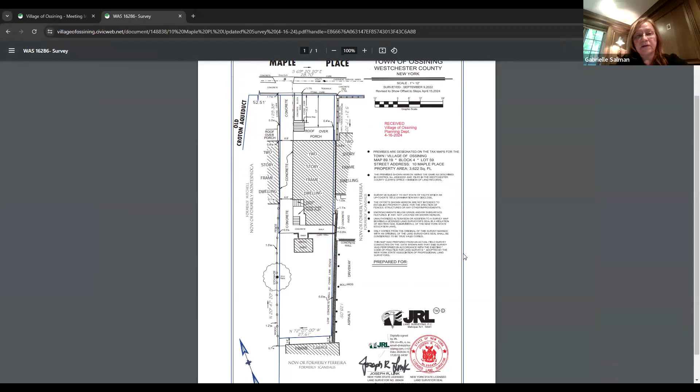And all those items are in non-conforming condition with respect to the zone. We are required to have 30 feet in the front yard, and we have 14 and a half. I'm sorry, we have 15 and a half, and need a variance of 14.5. And with respect to the side yards, we have one yard only 0.2, therefore we require a variance of 7.8. And we have combined yards of required 20, and we have only 7, so we need a variance of 13.

Now, these are existing conditions going back to, I guess, 1825. These are not self-created. This is a legal two-family with a legal basement, which we are going to be renovating as well. And we would like to get these variances in order for us to continue with the project.

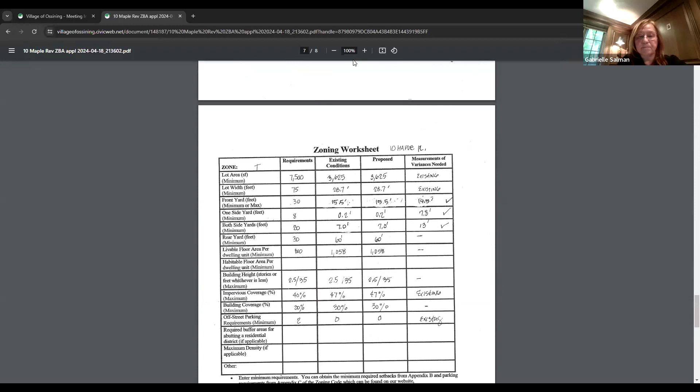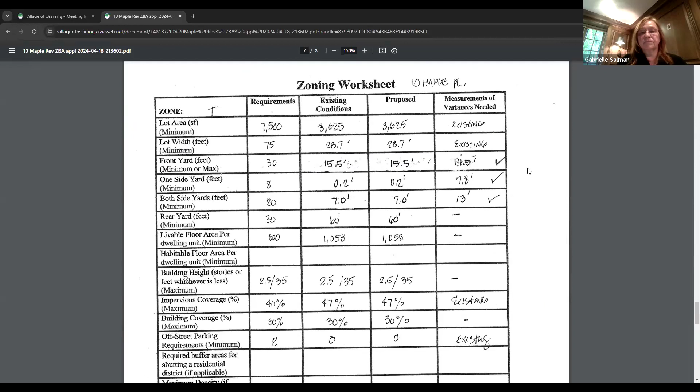Are there any questions from the board? You're Mr. Chen, correct? Yes. Okay, thank you. No question from the board?

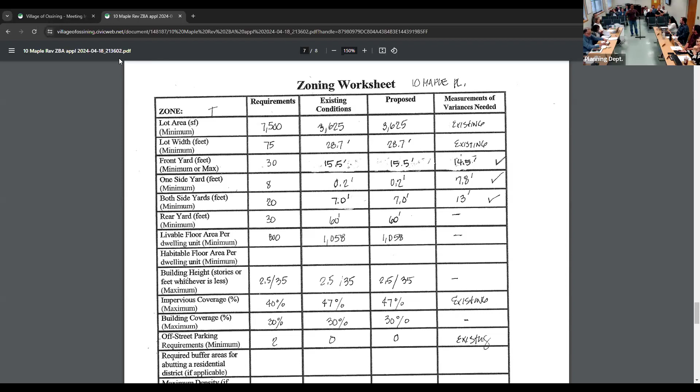But the main thing, like the architect says, is it's a two-family, and I know we have little kids too, and I don't want any accidents. Even myself during the winter, the steps are really old and slippery. I would like to change them to the new products out there now, like AZEK, to make it look nice the way everybody's doing these days, because most of it is painted and the paint is peeling off, and I think there's some lead too, since it's pretty old.

That's why it's one of the main reasons we've been trying to get the project going, and we've been in the process. So I understand you have a porch there that's being replaced, correct? Yeah, there's a porch already existing, we're just replacing it, updating, basically repairing it, because one side is kind of tilted a little bit, and we're gonna fix it. The roof, the shingles, everything needs to be fixed.

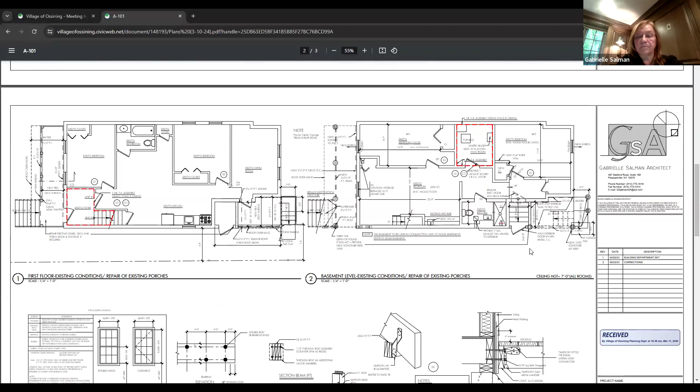This one seemed to me like one of the easy ones we've had in the past, where for safety reasons or deterioration reasons, they're replacing. Sometimes there's a small change, like doing brick instead of stone, but if the zoning board application is correct, it's keeping the exact same footprint.

Right, but then my question was, if they're not taking down the whole porch and only removing a section, do we need to be here? Did they need to be here? Normally that's not how... but that's why it was presented as a replacement. So do they need to correct the paperwork?

I think we had this conversation, and the discussion was that what was submitted was a replacement. The plans were for replacement, but the architect continues to say repair. But that's not what the thing is proposed as. So can we consider and vote on tonight what's there? And if it's not needed, then no harm, no foul? That's how I would recommend proceeding. Just proceed on the application as presented, that makes sense.

So may I have a motion to open the public hearing on this application? So moved, Kyle. Second, Brian. Is there anyone in the audience to speak on it? Is there anyone on Zoom to speak on it?

May I entertain a motion to close the public hearing? So moved. Second. It was moved and seconded. The public hearing is closed.

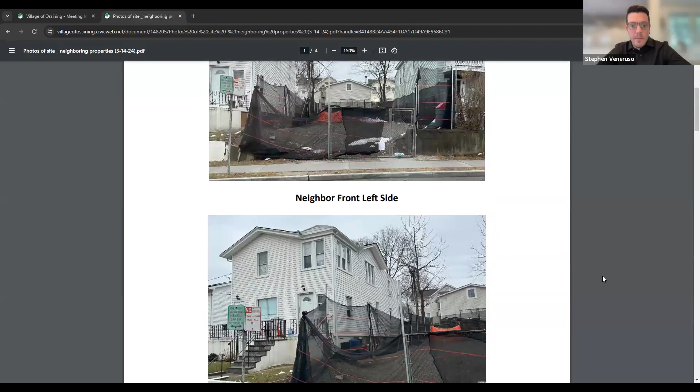The proposed project before this board consists of construction of a two-family structure with a garage for 2 vehicles on the lower level, as well as a front driveway. The building, as some on the board may know, has been vacant for a number of years.

My client purchased the property approximately 5 years ago, and my understanding is it's been vacant prior to his ownership about 15 years. So he's trying to revitalize this parcel, bring it back to life with a brand new construction of a two-family home. The proposal calls for the ground level,

the structure to be a concrete masonry structure containing a two-car garage, a common area, a powder room, and a mechanical room. Now, the two upper floors proposed using a wood frame construction system, each floor containing a kitchen, living, dining area, as well as a balcony, a laundry room, one full bathroom, and 3 bedrooms.

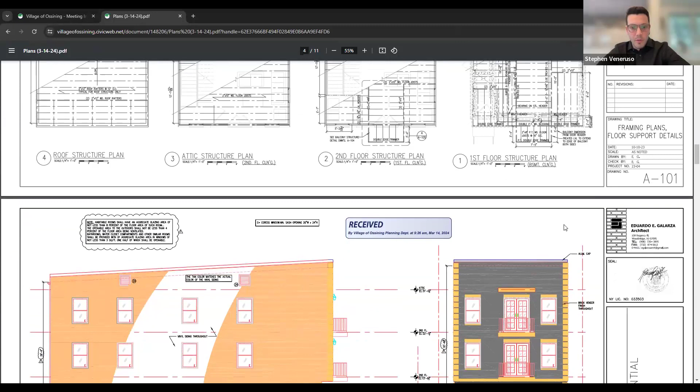In accordance with the building application review dated February 2nd, the proposed project before you seeks several area variances. These area variances are for the front yard, the side yard, both side yards, rear yard, max coverage area, max impervious surface, and max number of stories/height. Additionally, the project calls for a parking variance for the number of off-street spaces provided.

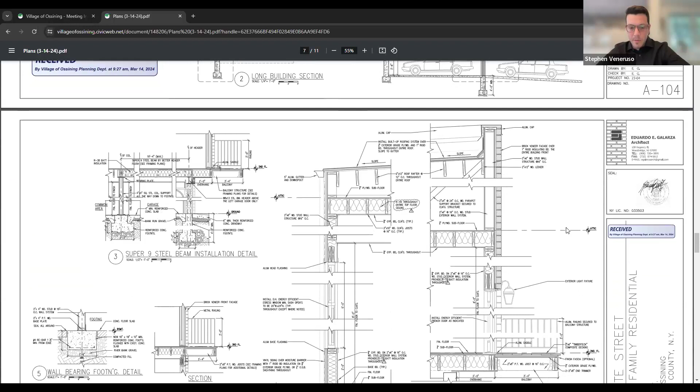Before I jump into, I want to make a couple points regarding the 5 points of law. Proper notice was sent out on this application. We have not received any negative feedback from the community.

In fact, my client did call me today. Somebody had called him, a neighbor for the parcel. I don't know whether or not they're in attendance tonight, but basically advocating for the property, stating that it has been vacant for so long, and they were excited to see this parcel come back to life.

If I could quickly go through the 5 points of law, and then I would open it up to any questions that the board may have of either myself or Mr. Galarza. One, whether the requested variance would create an undesirable change on the neighborhood.

I would argue that this would not create an undesirable change on the neighborhood, and to the contrary, I think we would submit that it would raise the overall aesthetic of not only the property but the street and the surrounding area, given the long vacant history of this parcel, as well as the fact that it's surrounded by similar two-family structures. I would argue that it would blend seamlessly into the neighborhood.

Number 2, whether the benefits sought by the applicant cannot be achieved by some other method more feasible to the applicant. The benefits sought here, we would submit that it cannot be achieved in a more feasible method. When developing the project, the applicant did look at alternate proposals as well as different ways to lay the property out and the home out. But ultimately, the seeking of variances, which we are looking for from the board, were a necessity to make the parcel work, the structure work, as well as making it economically feasible for my client.

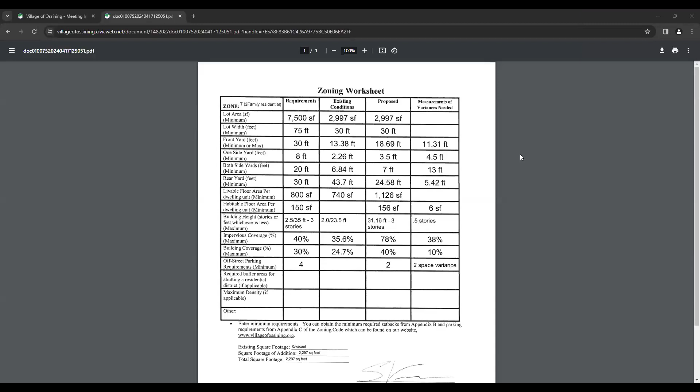Before we vote, let me correct a couple of things. The property has not been vacant for 20 years. The current owner, when he purchased it, there was a house on there. He took a demolition permit to take it down because it was in dilapidated condition. The reason I'm bringing that up is because if we were developing a vacant lot, you would need variances to the size of the lot and width of the lot and so forth. But there was a house here as recently as 6 months ago. So they're proposing to put back a house because the other house was in bad condition, not repairable.

Correct, I'm corrected on that. What I really meant was the client did take down the house that was there. It was really the condition of the house. I don't know whether it was occupied or not, but I'm told it was dilapidated. I don't know if anyone was living there, but that is correct, and for the record, there was a structure there.

We're seeking to put back a two-family house, which was already there. It was vacant for some time. It was previously a two-family house, I believe. He took a demolition permit because it was not repairable, and the intent is to replace it with a new structure. That's correct.

I was waiting my turn, usually talk over people. So all of this makes sense with the exception of 3 things. I'm not even going to ask questions about some things because they seem totally in line with decisions we made before. For me, front yard, side yard, both side yards, rear yard, livable floor area and habitable floor area are all improvements over what was there previously, so that doesn't bother me at all. It's actually an improvement over what would have been there if you were able to redo the house.

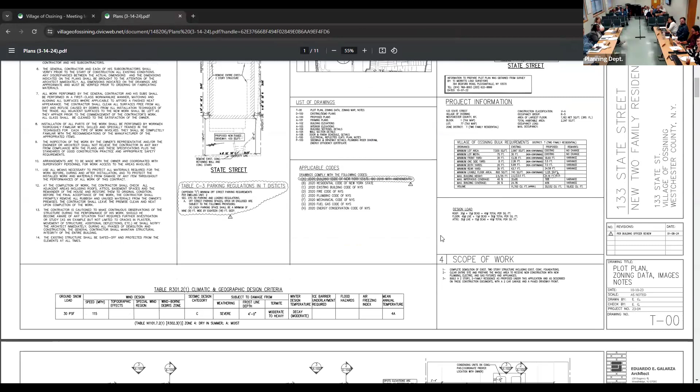Can I piggyback a different way? When we look at the new plans, I don't know if you can bring them up. I had questions more on the parking in the front, because it looks like you are going to put a parking garage under the house, and then have 2 parking spaces in front of that garage. I'm not sure if that's allowable because it would be parking in the front yard, so that was a big question that stood out to me.

Secondly, if you're grading up to that garage, and I don't know, this may be a building department question, is that also considered a story? Because you'll be walking up to the house, or is it lower enough that you can take down a half story into the garage? Well, that's a couple of questions. Right now, the applicant is applying for a 2-space parking variance, so they have on the plans 2 vehicles showing like they're doing tandem parking in the front yard.

If they were proposing it this way, their variance request would be different. It would be for parking in the front yard. But tandem parking wouldn't be an issue because it's a 2-family house, and you can have tandem parking because one apartment would run the garage and the other the other.

But what does pose the question here, because it wasn't really explained in the submission, is what the slope is to that driveway, because there's also in the zoning code where you can't have more than a 10% slope. It looked like on the new picture they graded it all the way down to the grade.

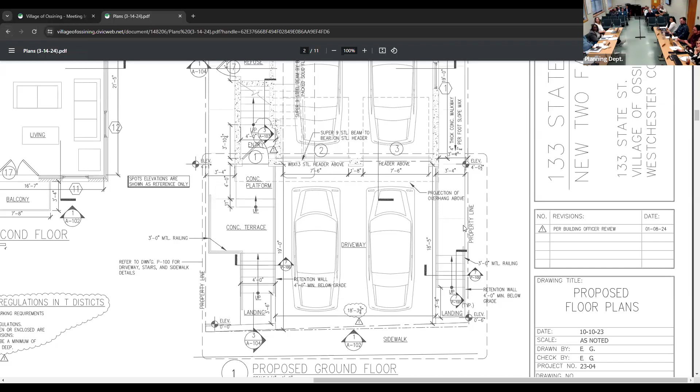Right, which is why I don't know if that's the reason why they end up with 3 stories, because what you're essentially doing is having the garages underneath the apartments. That's completely out of ground, so it's 3 full stories. So that was my question. And then they have a staircase that looks like that's how you get to the front door, which is essentially now the second floor.

Which is what I believe they're proposing, but one of the questions, and I guess the architect can answer that, is if they have a driveway up to that garage, if that has an incline that's more than 10%.

So Eduardo, just if I hear the board right, I believe what you had stated is correct, but I'll let Eduardo take that as well as the parking. Eduardo, can you jump in on those points?

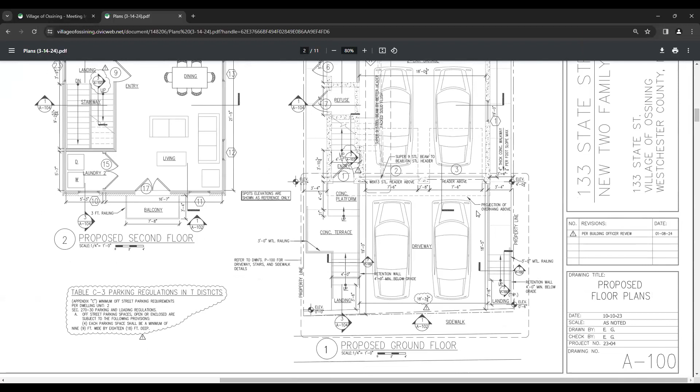Yeah, we did the correction on all these issues regarding the incline of the ramp. We did the minimum required on that issue, so that's what I have. A section — you can see a section, it explains clearly what the issues are. And also you can see the parking regulations and the T district.

Is there also a specific drawing that you want me to pull up, sir? You can move on the section plan, because I don't know if I can access my plans over here. This? Right there. Okay, yeah, that's a building, right? Great.

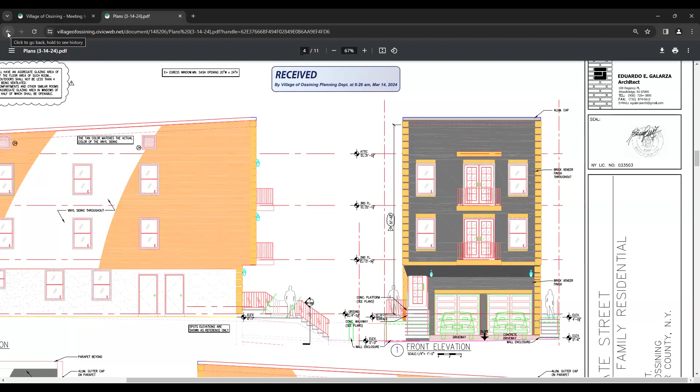So to achieve the parking of the garage, are you planning on doing a lot of excavation to bring the grade down, because there is a retaining wall? Yeah, there is no need, because there's a minimum excavation — the house itself is at a higher level, and there are some stairs going down.

And in the existing conditions, I have some pictures of the existing house. It has some stairs going down, and I think that's the only part you have to dig out in order to have the driving into the house.

Right, there was a retaining wall there, and when they did the excavation here, right? We're removing that part in order to achieve the access. And also you have the stairs on the left side of the project, that's to get up to a higher point.

So parking will be at grade, at ground level? Parking will be at the higher level of grade, correct. And then the driveway would go all the way down to the street level, to the sidewalk level.

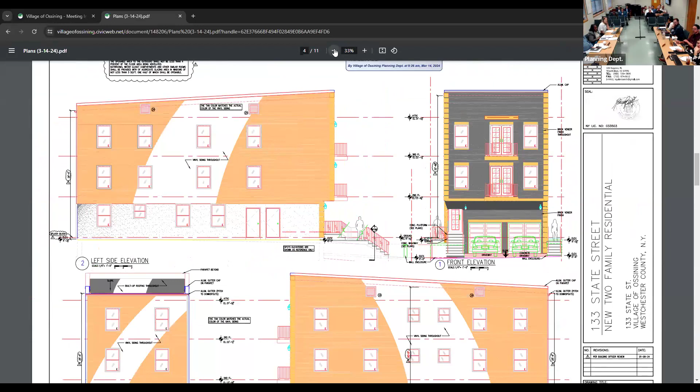I'm totally confused — do we need off-street parking or not? I guess the architect can clarify that. The drawing he has shows 4 vehicles. No, the question is, with the intent of parking 2 in front of the garage...

But you're requesting a variance where you have to have 4 off-street parking spaces, and you're indicating you're only gonna have 2. So the question is, are the 2 cars you're showing on the driveway actually proposing parking there, or is that just to show vehicles entering into the garage?

Well, I think the idea is that the requirement of the project is 2 cars per family for the 3 bedrooms, so we need 2 parking spaces for each unit. So we are proposing to have these 2 inside the house and 2 outside the house.

Isn't he missing a proper variance? What you submitted for a variance request is to only provide 2 parking spaces on site. We were asking the board for a 2 parking space variance. If you're proposing it this way, your variance request would be different. You'd be asking not for the number of parking spaces, but rather for parking in the front yard. The way it's written, you're asking us by application to give you 2

On-street parking spots, consideration as a variance versus all 4 on the property. But then the question, if you're asking for 2 spaces off on the street, then you need some kind of parking study, because I know that area. It's difficult to park on the street, so we don't have that information in front of us. We're kind of at a loss whether we don't have the right thing for tandem parking, or parking in the front yard, nor do we have the right thing for parking on the street, because we don't have the backup information for that either.

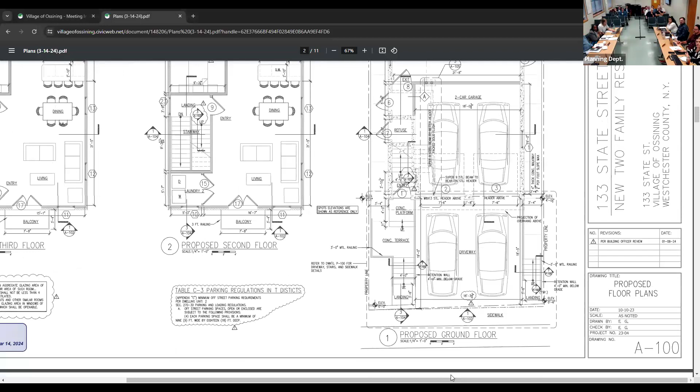Are you aware that in the code, parking spaces have to be 9 feet wide by 18 feet? If you look at the size you have in the front yard, that would be putting the car pretty much right up onto the sidewalk. If that's what you're proposing, then the board would have, you'd have to change your variance request for parking in the front yard. The consideration is the amount of space you have, because I believe you're asking for a front yard variance, where you're pretty much only leaving about 18 feet from the front facade of the building to the end of the property line. And if you have to have a parking space that's 18 feet in length, you're pretty much parking the back of that car right up against your property line.

But I think the driveway is going to be an empty space anyway. And if the code requires 2 cars, we're just proposing that they can park over there, because a car's going to go in through the driveway anyway. Most people usually have the cars parked outside in the driveway. So that's why we proposed to have 2 cars. After consulting with the code, it is required 2 cars per unit. So we have this to resolve that issue.

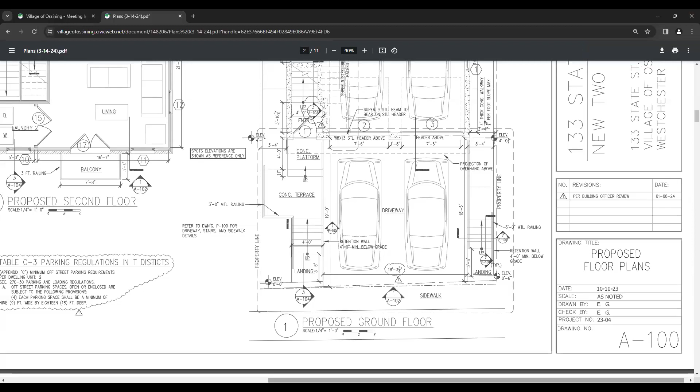Just to jump in, if I'm hearing the board right, and I can follow up with DHB following tonight's meeting, if the applicant continues with this plan to park 2 cars in the garage, that would require a separate essentially area variance. Not in the garage, but in front of the garage. The 2 spaces in the driveway, excuse me. Correct, okay. Put up that plan.

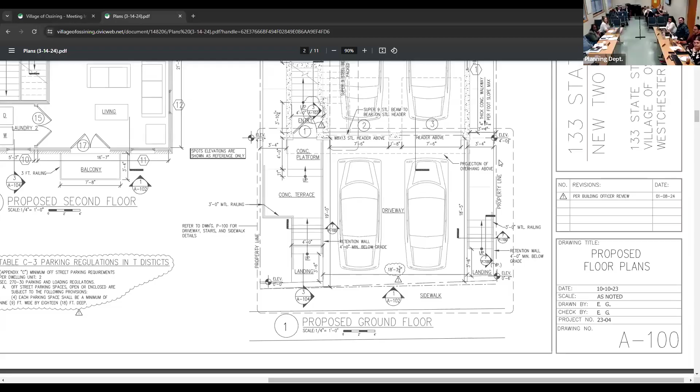What is the length that you're showing on the right side? 18 feet, 5 inches. So if you have to have 18 feet, you've left yourself about 5 inches from the property line. That would park the cars pretty much right up against the sidewalk. But you can propose that if you want to do that as a variance request for parking in the front yard.

But then the board is going to consider that as a factor. Any decision, any vote we make cannot be made on the assumption that you are going to leave that space empty. We need clarification as to the intention, and therefore make a decision on, if you need the 18 feet, then the application should be updated to reflect that.

And I also believe Karen would have to say that was not noticed, so it would be a different variance that would have to be renoticed accordingly. And Joel, my question for you is, if they are parking the 2 cars in the driveway, would they still be meeting the driveway setback for the T-zone? If it's pretty much flooding right up to it, would it?

Would it have to be two feet off? Well, it wouldn't be for the front because you have to have a street access, but you would have to maintain the 2 feet off the property line. Okay, which it appears they have that, because they're showing it. But, you know, the code doesn't permit parking in the front yard, you'd have to apply for a variance in this board for that.

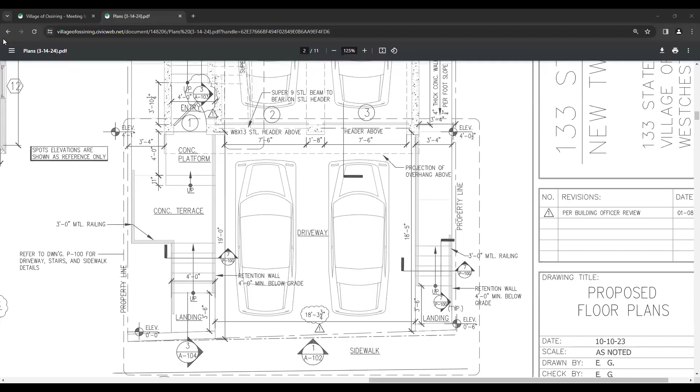That really would require a variance. Great, but we can remove that. Yeah, that's not a problem. I just do want to jump in on the proposal sought. I will talk to the applicant.

I don't know that he has, per se, economic numbers like we would for a use variance or something like that. I think it was more in the totality of figuring out how do you structure the parking as well as getting a 2-family on there, so I think it was more viewing it in that lens, rather than -- I don't know that he's going to have economic numbers to support that, but I will check with him to see what steps were taken during the initial planning. Absolutely.

Any more questions from the board? Does the board have any comments on the impervious coverage?

Yes, it does. Am I reading this right? There's also a walkway on both sides of the building, so it's gonna be impervious pretty much up to the whole property front line, the whole side yards, all the way till you get to the rear yard.

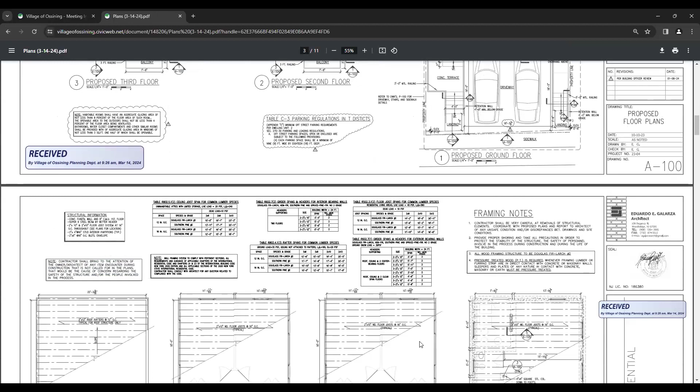Yes, there's supposedly concrete pavers on each side, about 3.5 feet each, and it slopes down all the way to the street.

Would you consider using pervious pavers? That depends on how the client wants to treat that, but I will recommend that, that's for sure. We can recommend that, absolutely.

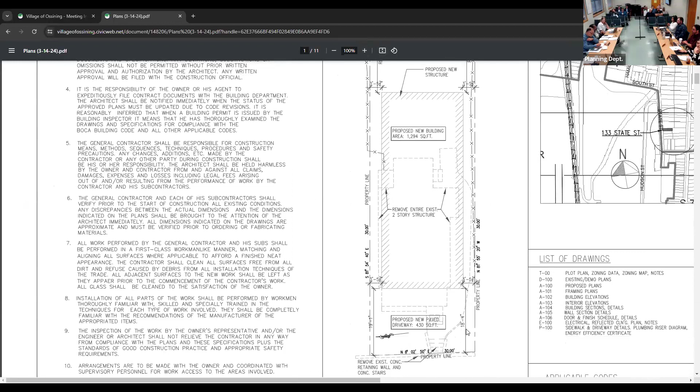Because they're taking away all of the grass, for water runoff and all that. Right. And when you're talking about the character of the neighborhood, if you look at all the adjacent homes, they have little front yards and they're not parking lots in their front yard.

So it's kind of, I would almost rather grant a variance for on-street parking, not necessarily - I'd be interested in seeing that as well, just because it's a lot of impervious surface. Or any type of front yard treatment that might help with curb appeal a little bit. Understood, I'll discuss that with the applicant.

Parking in one of the houses down the street. Well, different - most of the homes on State Street don't have parking off street, which contributes to the parking problem on State Street.

But the consideration is obviously when you're gonna put a driveway at the width they're gonna need, you're eliminating basically two parking spaces on the street. Yeah, the front yard one we did was on Broadway.

That's a good point. But I thought we did one on State Street as well, but down further. This property happens to be across the street from Sing Sing, so. I walk by that place almost every day.

Isn't one of the conditions to be given a permit for overnight parking that you must show that you don't have room? Right. Yeah, a lot of the homes, the people who live there apply for overnight parking because they don't have the space.

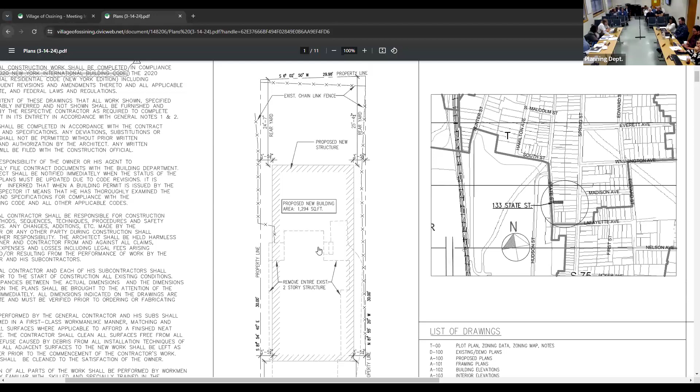Oh my God, okay, yeah, so that may even more so then. There is a rear variance, yeah.

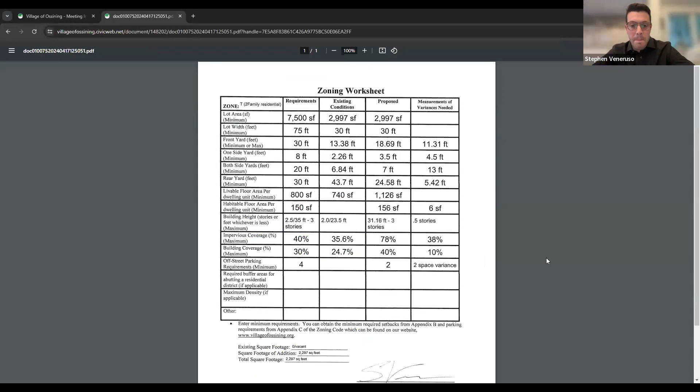You can see from this that previously the condition was 740 for floor area, now it's 1126 to accommodate the increase in size. They moved the building and made it larger in the back.

But it's still not, tonight, a very big house. I'm assuming we can't vote tonight. Are we voting on any of them? No. But there is a question that was discussed: the ground level of the garage, what that area is going to be.

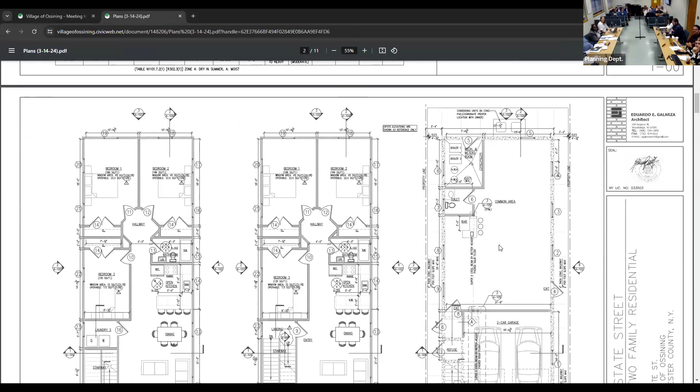In the back of the house, behind the garage, if we pull up that picture, it looks like a common recreation area with a bar. Are there plans for that in the future, or is it just going to stay open?

It's my understanding that the owner would like to have that open. They like it because there's a big space there, and they would like to have a bar so whenever they come they can stay there. That's what I gather from their information. But the reason that question would be asked is if they're increasing the square footage of the house

to accommodate larger apartments, why would that space not be utilized for parking, or for part of the apartment, part of the living space? And also, it would take care of the apartment situation in the front, because you pushed the building to the back. That would be a question for the owner.

Remember, we need a parking area, a garage, so the space that's left is very difficult to fit something into comfortably. It would be very uncomfortable to have any residential unit there. That's why we'd rather have two full floors, nicely spread over the area, and just a common area downstairs.

The question I would ask is, normally when you create a common area, say a recreation room with a bathroom, that living space is combined with one of the apartments, not a separate space that's not part of the first or second floor apartment. As the architect said, it's for when the owners come over, understand that it's not meant to be another apartment or living space, because the absentee owner needs a space to stay.

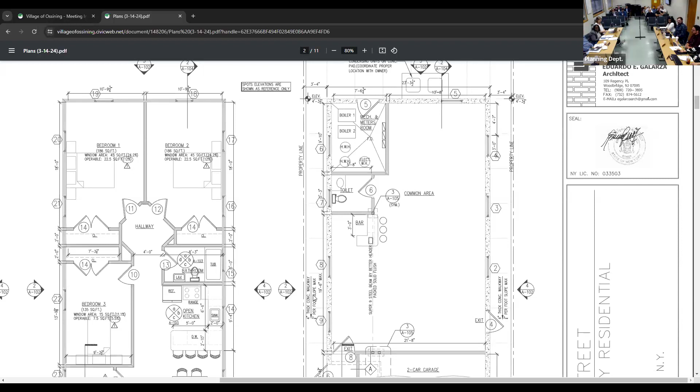I would say that in this proposal, that space has to be combined with a connection to the apartment above it, so that the people living there could use it as their family room. Does the owner plan to live there? Well, the architect said it's for when the owner comes to stay, so the two apartments would be rented out, with him as an absentee owner.

Are the residents living there able to use that space as a common space, to throw parties, have people over, family, a barbecue, something like that? Or would it be strictly for the owner and not usable by them?

If that space isn't part of the apartments for direct use, then you could shrink the property to avoid using it for an absentee owner, or extend the garage so you could fit more cars, maybe four instead of two. Then you wouldn't need parking in the front yard, because all the parking would be in the garage.

I'll follow up with the applicant after the meeting to get more information on the plans. Just for the record, I know he doesn't have plans for commercial gatherings, only for tenants or ownership. But I'll get more information to flesh out that common area and address the board's points regarding it.

Variances live with the property, not with the owner. So if he turned around and sold it, whatever variance we grant still lives on. Understood.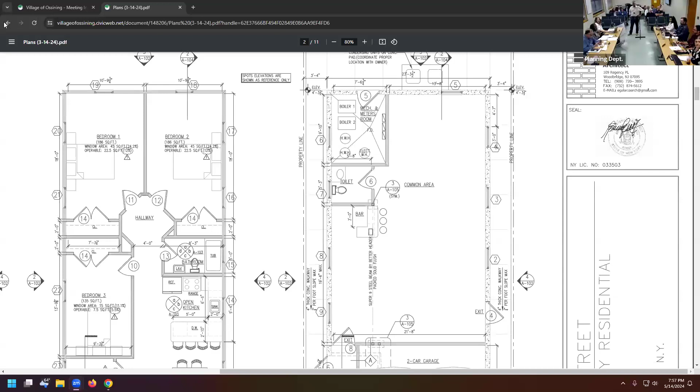Before we get started, I have to let everyone know that this property is directly across from my house. If there's no objection, I do plan on being objective and impartial, but if it's okay with you I will continue to go through the process. If not, I will recuse myself.

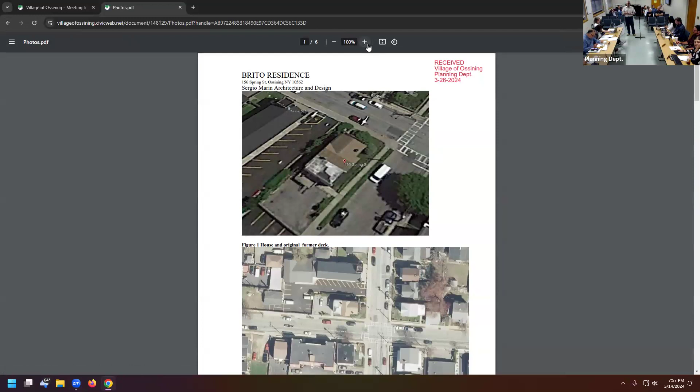You're good. All right, so this property is on the corner of James Street and Spring Street, so therefore it has two front setbacks. So the deck that we're trying to legalize—the setbacks actually overlap.

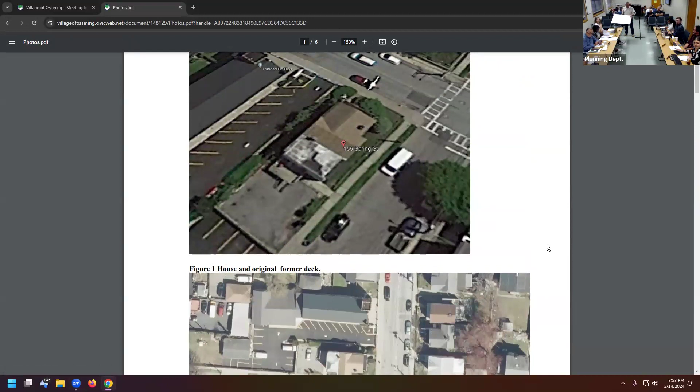This setback is a front setback and this is a side setback. There's no place to put this deck. Let me bring it up on the screen so you don't have to point. That picture shows there used to be a deck there before that was in disrepair.

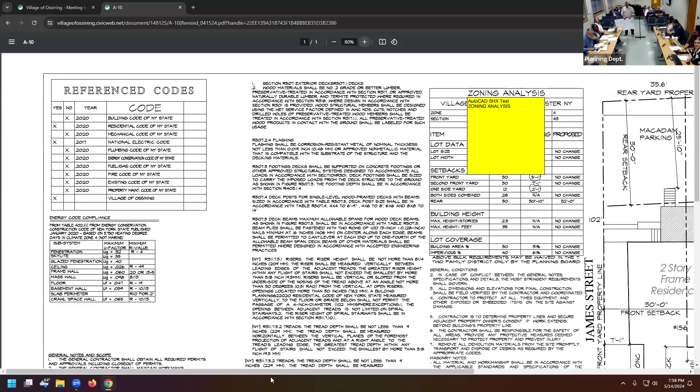It replaced the deck with a permit. So this is the first step. I have two site plans here. The one on the left is with the existing deck that didn't conform, and the new deck is actually smaller. If you scroll down... yeah.

May I? Sorry, we don't have a laser pointer, so whatever you point to, I will circle. So this is the front setback from here, this is the side setback from here, so they overlap. This is the proposed deck, this is the existing deck that was there, this is the proposed deck.

So wait, the deck that was there or the new deck—this one here? This deck was there and was taken down. The pictures I showed you from Google Earth show the existing deck, so that's the deck that was there. This is the deck that's proposed.

Proposed, but you built it already, right? It's already built. So the existing deck is the smaller deck? No, no—existing based on what? This is the original, that is now gone, that's to be legalized. This is the current one, not the second—the second one is the current, legal one.

Right, so first things first, we gotta go through here. So I guess my first thing is, looking at this, it looks like you pulled it further away from the parking lot, you shrunk it down in size a little bit, and you added the stairs to the right versus in the rear.

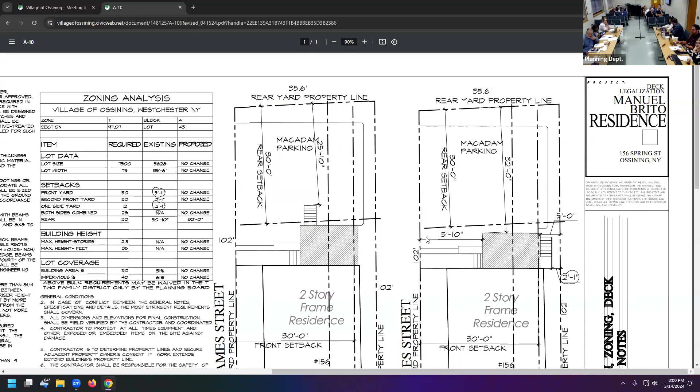They're not gonna interfere with the church parking lot next door? No, no. They're still away from the property line.

I'm making it green though.

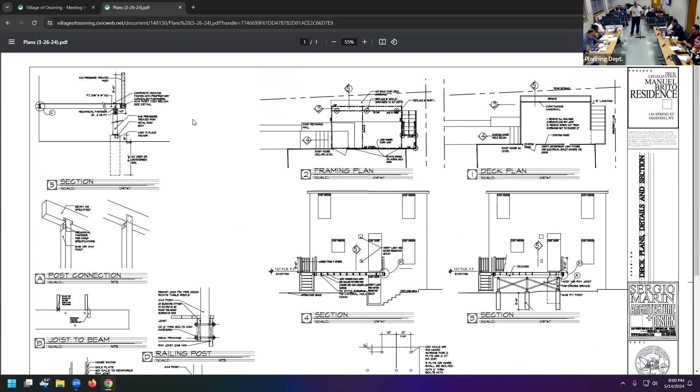With the original deck that has been removed, the staircase was actually in the setback for the rear yard, which is now gone, but putting it on the side created the need now for a side yard variance. The board should know that the lot width is only about 35.5 feet, and this district requires a 30-foot front and rear yard setback.

We come across that all the time. The both side yard setback is 28 feet, I believe. But I only have one side yard. I got two front yards; that doesn't apply. This is what it looks like now.

Gotcha. What's missing, what we have to correct, is the front yard variance request, because it's not shown. But is there a front yard variance? Yes, because you're applying for a front yard variance from James Street. It was kind of confusing. If the board does ultimately vote to approve this variance request, we're going to request a condition that this zoning worksheet is updated to include the setback from James Street.

That would go on that other section at the bottom. But it was noticed, so it's fine to proceed. It's just a technical thing on the zoning worksheet.

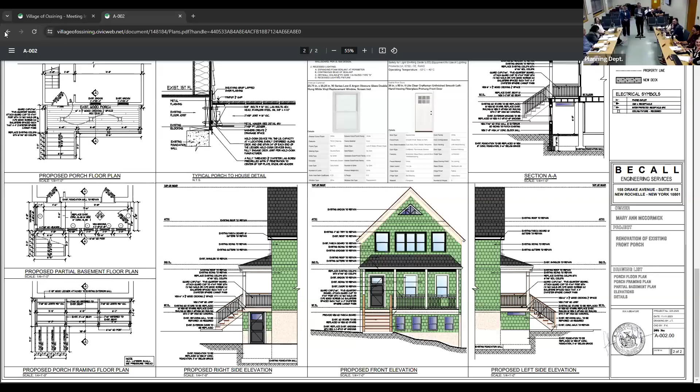Again, with this one as well, they need to correct the zoning worksheet because it did not give us any measurements, it just said variance required with no measurements. So that should be fixed. So similar to the prior application, if the board votes to approve this application, we're going to request as a condition of approval that the zoning worksheet is updated, so where it says measurements, the variance needed should show the actual number of the variance required.

One thing to note is the front yard, 14 feet, I believe, is to the porch, but it's like 8 feet-ish to the stairs, so that should be the number used there. Okay, so I got it, it should be 8 feet to the stairs. Do you know, to get the calculation correct so we don't end up having an issue?

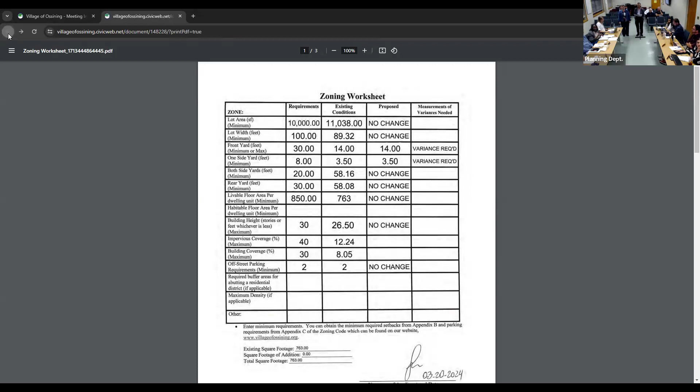Yeah, this survey says 14 feet to the porch steps. So it says 8 feet 10 inches to the porch stairs. So that would be what you're proposing, and the difference is the variance. So 16 feet is from the stair.

So what is 16 feet with 8.83? Does that say 8 feet 10 inches? 8 feet 10 inches. If my math serves me right, that's a variance of 21 feet 2 inches? Well, property lines are visible.

So I think after that property line, you have to say... one at a time. Sometimes you have a 15 feet sidewalk. So what he's proposing is like 8.83.

So the variance would be the difference of 30 feet minus 8.83. The variance request is 21.1... 21.

And the side yard remains, the one side yard remains. Inside remains the same. So when those corrections need to be made on the zoning, we will submit.

There are no questions from the board? If there are no questions from the board, may I entertain a motion to open the public hearing? Motion to open, Olga. Seconded, Brian.

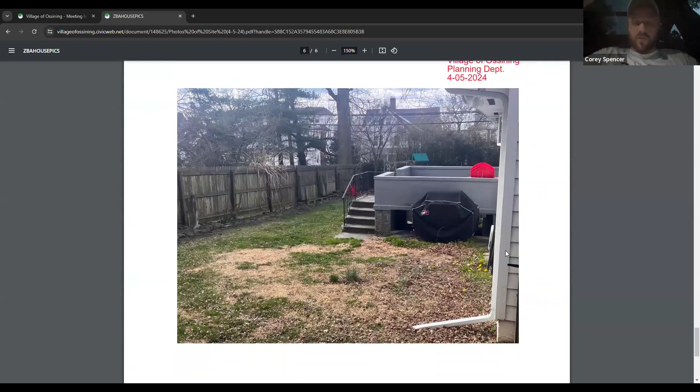So the variance is in regards to the addition, for extending our kitchen and a bedroom on the back of the house. There's a porch there currently which we would remove. The porch itself sits slightly over the allotted lines - where the staircase is, that railing is almost an inch beyond the allotted line. So we need a variance just to hit that marker. We made the decision it would make sense for us to get to that point for that space, and that's what the variance request is about. So we would extend the house backwards to hit that railing.

Does that make sense? I just want to be clear, you are only looking for a rear yard addition. Correct, yes ma'am. But one of the questions I have is, I believe the garage that you have now is being converted into additional living space, correct? Yes sir, that is also correct.

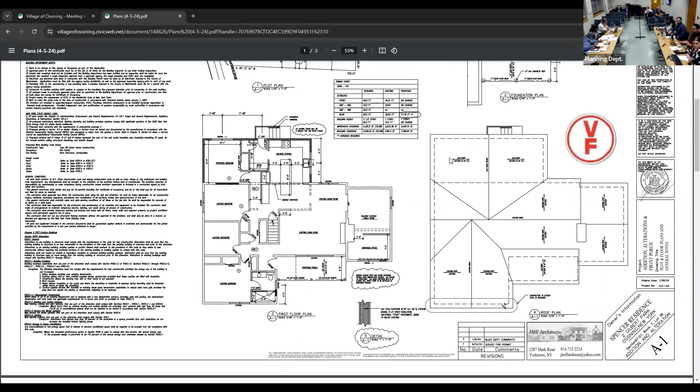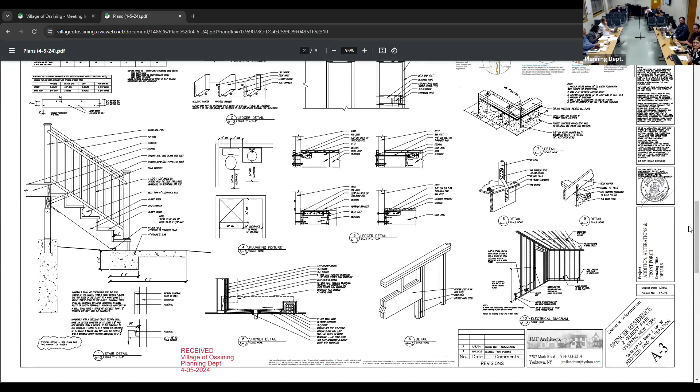So the question to the architect was, now that you're removing the code compliant parking space which was in the garage, where would the parking be located? When he submitted the revised plans, he's now showing the 2 parking spaces in the front where you're going to widen the driveway. That may not be where you need a variance for the number of parking spaces, but parking in the front yard requires a variance, and that was not applied for.

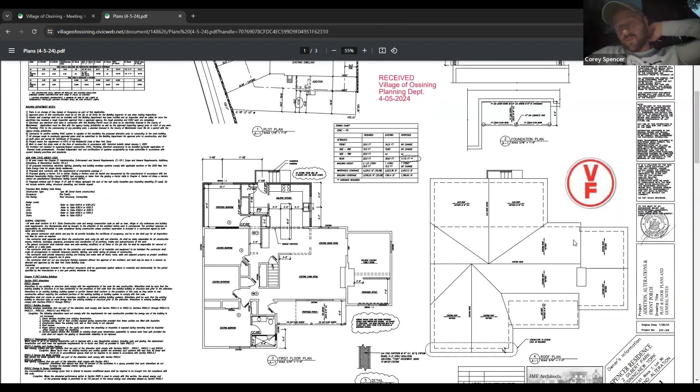So a front yard parking variance? According to our architect, a front yard parking variance wasn't needed, but if that's something we need to apply for, then that's fine, happy to do that. Joe, I want to ask you a question, because I was thinking about this earlier. It looks like this is a 25-foot front yard setback.

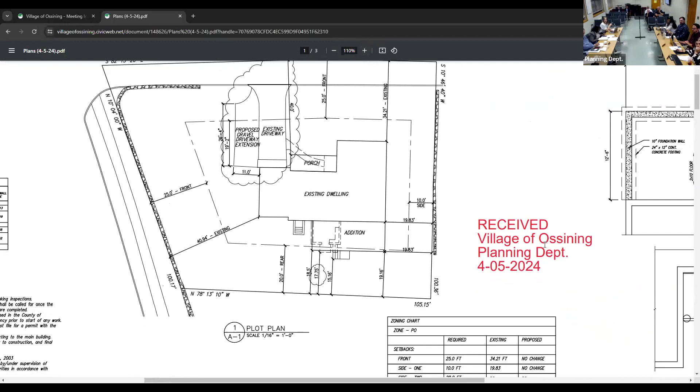If he has 2 compliant parking spaces beyond the front yard setback, does he still need that parking variance? Yeah, because the code says that parking in the required front yard, which is basically from the front facade of the building just to the front, is considered parking in the front yard. Which is fine that he's proposing that to accommodate the 2 required parking spaces. But when he removed the requirement of a variance request for the number of parking spaces, he had to apply for where the parking is going to be located, which would be in the front yard of the property.

So is it possible for us to vote and discuss the current matter and then give him the condition that he needs to come back? It wouldn't even be a condition, it has to be renoticed and everything too, because it wasn't noticed. So the board, if it so chooses, can decide the rear yard variance tonight, and then the applicant can come back for whatever parking variance they might need. Or it's up to the applicant.

If you'd rather the board wait, they can decide both variances at a subsequent meeting. It's really up to you. Is there a benefit to go either way? We can start work sooner. Start work sooner. Well, what you'd have to do is essentially split the permit application up, because right now you have an application to do the addition together with converting the garage.

What you can do is, if the board grants the variance for the addition, we can make them into 2 separate permits, so you can start the work on the addition while you're waiting to see if you can get the variance. That would be great. Yeah, I mean, so I would prefer if we could get an approval for the rear yard addition. I'll work on a permit application for the front yard, or for the front parking space, whatever the proper terminology is.

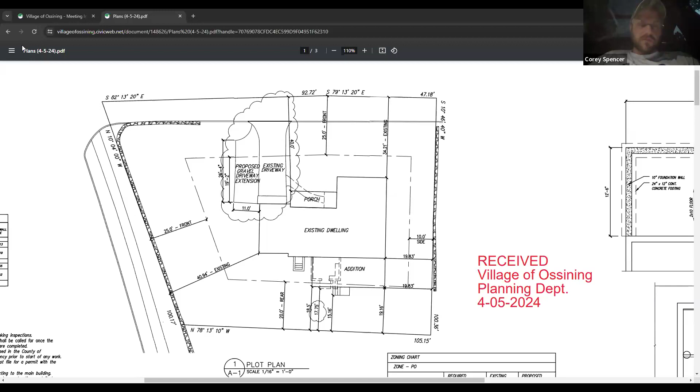I guess I'm just kind of looking at the property itself. Is there another place to park besides the front yard? Well, the driveway accommodates 2 vehicles. There's an existing driveway there too, towards the garage. Right, but that's kind of a tight driveway for 2 vehicles.

Well, we're gonna widen it. Okay, well the option would be, where he's widening it, he can put the parking on the side of the house, which would make it compliant. Right, so he would not need the variance. So like a carport type of situation? I don't know, you'd have to create the two parking spaces, but they'd have to be on the side, but it appears from the site plan that there is probably enough space to do that.

So I'm assuming that would be a discussion between him and whoever he's working with. Yeah, on the parking. Okay, yeah, I'll bring it up with them. Thank you. That's, you know, I was just looking at it because there's a lot of space to the side of the house. Corey, is that clear to you, what we just said?

Yeah, you mean just to clarify, the side of the house, you mean like the actual side, that's where the garage backyard is? Sorry, well let me ask you a question. I guess what I'm looking at is a site plan. Is this actually a corner lot? Yeah, this is a corner lot, yes sir.

So that wouldn't be it, because it'd be a front yard either way. Because one would be facing Highland Avenue and the other would be facing Gilbert. So even if he puts it alongside there, either way, he's gonna be in a front yard.

So you weren't supposed to notice that, Joe. I have the same question as one of our other applicants. Nobody's mentioned the proposed porch in the front. How does that affect the parking issue? And the fact that the garage is being finished to be a living space, you said, right? Yes.

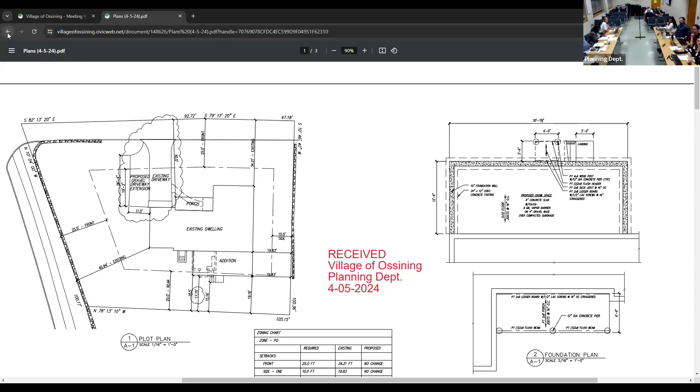Two public roads. Well, I guess it doesn't matter, unless we're asking for the parking to be on the opposite side. But then he'd have to move the whole driveway, which doesn't make sense. Nothing prevents him from having the garage turned into a living space and then parking two cars in the garage, just leaving the garage door area.

I think we're starting to go a little too far down the parking avenue. He's gotta figure out the parking and then just come back and let us know. Yeah, I'll come back. But we can talk about the rear yard setback variance.

Which is 1.5 feet or inches? Inches, I think it is. No, it's 1 foot 5 inches, that thing. So it says the required is 20 feet, proposed is 17.75 feet. So that's a variance of 2.25 feet.

Does he have to update the worksheet upon approval, or because it's on the plan, do we just... Wait, did you say that again? Hold on, no, you're right, the proposed is... sorry, I was looking at the wrong one. The required is 20, the proposed is 18.5.

Or 15.16, I don't know which. Hold on, oh, that's the old one, I see. Yeah, the old one was 30. Why is there two 17 numbers there? I'm not sure, that doesn't need to be on there.

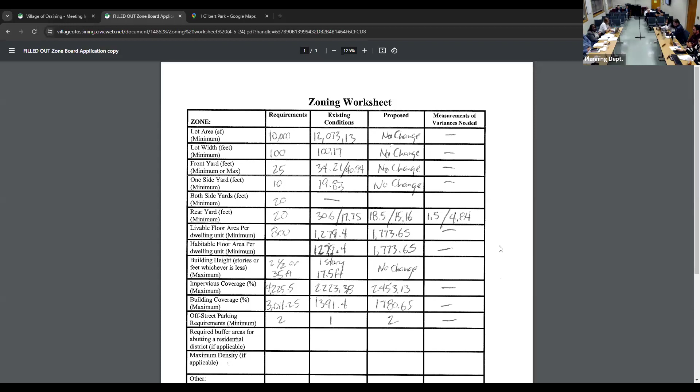Okay, but which one are they looking at for the rear yard? Is it gonna be 1.5 or 4.84? I mean, it's not that it makes too much of a difference, it's not really substantial. I'm looking at the zoning chart on the plans - it says the required is 20 feet, existing is 30.67 feet, proposed is 17.75 feet.

And so the zoning worksheet is different. Jill, let me ask you a question about that staircase - it's 15.16 feet. That's why they have two numbers - this is where the addition is, this would be what the setback is to the staircase, and this is which part would be for the building, which is saying 15.16.

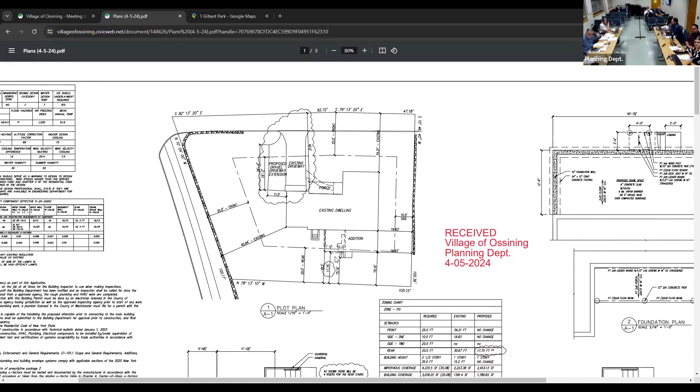So that was the 4 point - so what they're looking for is 4.84.

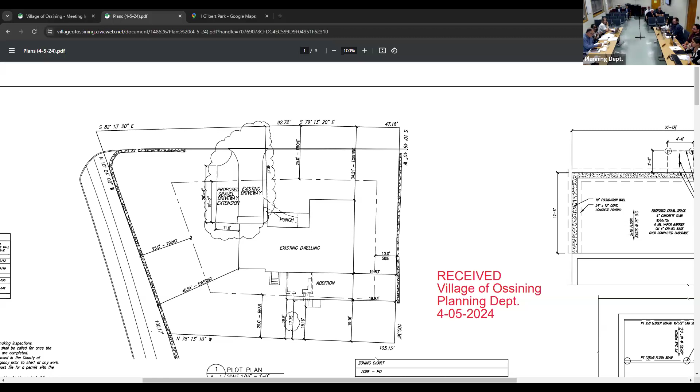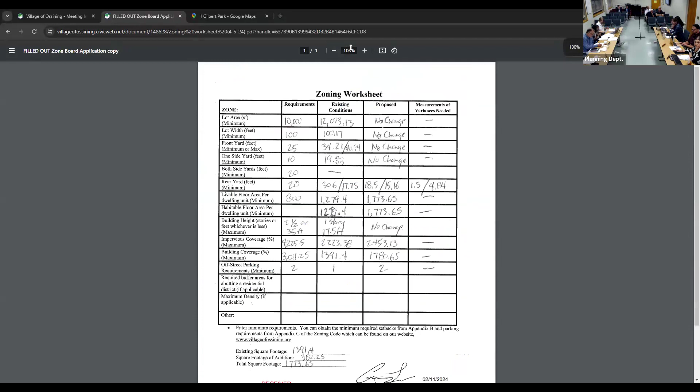So just like the previous applications, if the board does decide to grant this rear yard variance, we're going to request that you update the zoning worksheet to reflect the proposed of 15.16. Just to clarify it, they can take away the existing numbers and just say the proposed is 15.16, so it's clean. That's 15.16 and 4.84 for the variance request.

So for the rear only, is there any other discussion from the board?

May I entertain a motion to open a public hearing? Motion moved by Olga, seconded by Brian. If there's no objection, the public hearing is now open. Is there anyone in the audience to speak on this? Since there's no one to speak in the audience or on Zoom, may I have a motion to close the public hearing? So moved, Kyle. Seconded, Mike. If there's no objection, the public hearing is now closed.

Okay, here we go. Ready? I'm ready, I think I have it memorized. Okay. Hey Mr. Spencer, come on, I'll do it now.

Make it clear, this is just for the rear yard. We are not discussing parking. We will ask that the applicant come back at another time when he has noticed the public and figured out his parking. All right, the first factor is whether an undesirable change will be produced in the character of the neighborhood or a detriment to nearby properties will be created by the granting of the area variance.

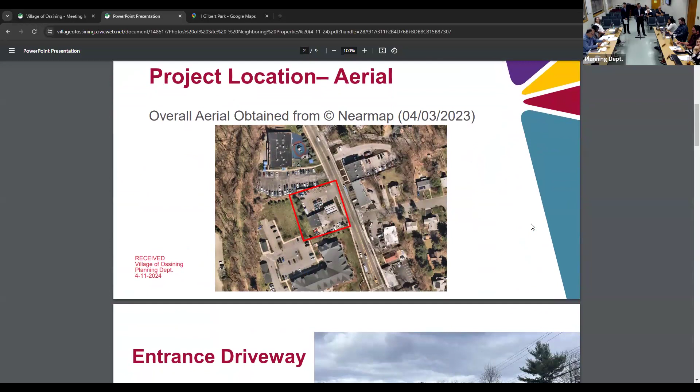Newish, right. Here with me this evening is Peter Saltakis from Kimley-Horn, a project engineer. As we said, the applicant's the owner of 237 North Highland, properties in the OR zoning district, currently improved with a gas station, approximately 3,000 square foot commercial building that has a convenience store, car wash, and a vehicle service bay. The applicant's proposing to essentially modernize and renovate the facility.

That's going to include restriping the parking lot, replacing the existing freestanding sign, and overall aesthetic improvements. We're requesting to eliminate one of the service bays. Right now there's 3, so we go down to 2 service bays and then expand the retail store by about 400 square feet. In connection with that, based on the building inspector's referral letter, he noted 5 different variances.

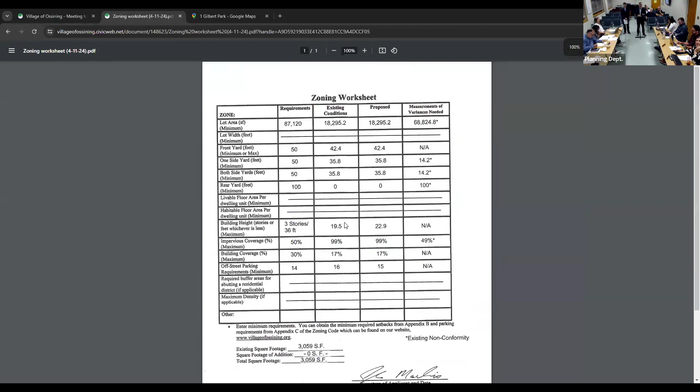3 are your run-of-the-mill area variances, and 2 are variances for non-conforming uses. As we looked at our plans, one of the variances he noted was the size of our parking spaces. Currently we have 16 spaces on the site. We are going to restripe those spaces and reduce the number by 1, so we'll have 15 spaces. We only need 14, so we're still zoning compliant, but that will allow us to get our parking spaces all zoning compliant as well.

They were too skinny before, was that it? I don't know if it was too skinny or too short. I think it was too short. I think the parking spaces needed to be 9 by 18, and for some reason, I don't have it with me, I think a couple of them just fell short of that number.

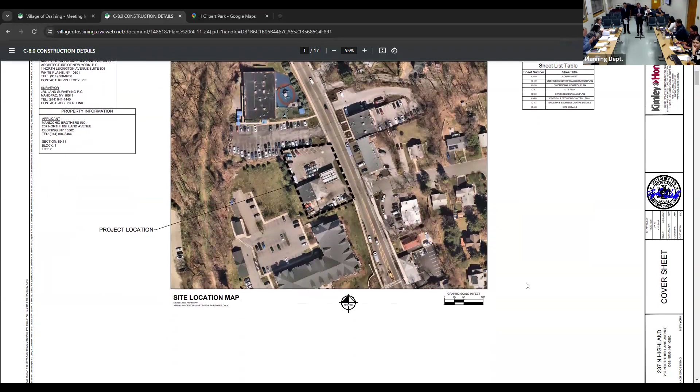This still allows the entrance and exit for the car wash with the reduced number of spaces? Yes. Okay, so again, we're reducing 1 space, all those parking spaces were compliant, so we don't need that variance. Impervious surface was noted as a variance. Could you just make sure that on your zoning plan, all of the spaces are dimensioned 9 by 18? 100%. So just so we're on the same page, you're saying that all the spaces proposed are code compliant? Correct. Cool, so you can take that off.

Impervious surface, that never happens. What's that? There's never enough property. You're good, I'm sorry. So we're allowed to have 50% impervious. We're at 99%. This is an existing condition, we're not adding any additional impervious. It just is what it is. So while that may be substantial, again, it's an existing condition, it doesn't change anything on site, how it operates.

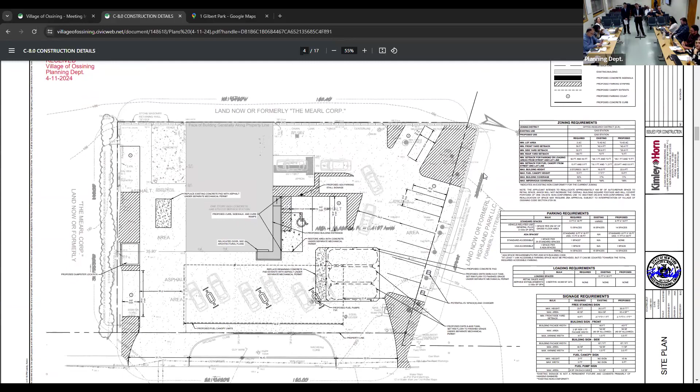The maximum size for a freestanding sign is 40 square feet. Right now it's 60.4 square feet, and we're proposing to maintain that 60.4 square feet, so we'll need a variance of 20.4 square feet. I don't know if we want to stop here and have a discussion about the area variances before we jump into the non-conforming aspect, or if we want to keep going.

I'm gonna jump in here. So on Joe's referral, he identified two additional variances being needed. One for the changing of the non-conforming use from the mechanic shop use to the non-conforming retail use, and then one for the expansion or extension of the non-conforming retail use into that garage bay, for lack of a better word. So I think that's kind of a threshold issue for the board to determine.

Isn't there a part of the code that addresses that, as long as it doesn't get bigger? I thought I read... this was actually known as interpretation, I think it's up for interpretation here. There's case law here, isn't there? There's everything here. Yeah, this is one of those things. So the code has two sections that are kind of in conflict in this kind of situation.

The first is the language about extensions and enlargements. This language says no non-conforming use shall be enlarged or extended, nor shall the intensity of the use be increased, except pursuant to the following. For commercial sites, the only way it can be extended or enlarged is if any non-conforming use of a building or structure may be extended through any parts of the building or structure that were obviously or manifestly arranged or designed only for such use at the time said use was rendered non-conforming. So that's one section about expanding non-conforming uses.

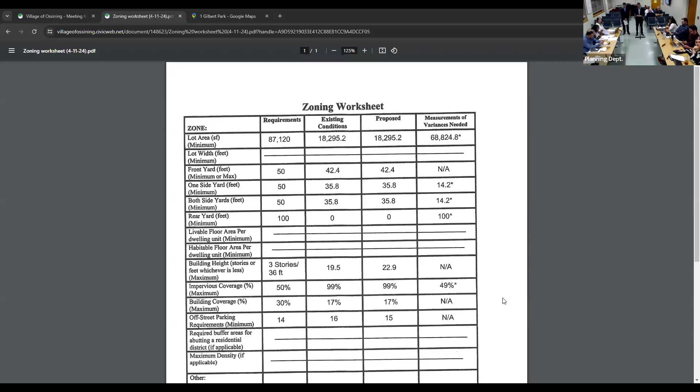Area variances. So there's the lot area variance, which is existing, proposed, and there's no change.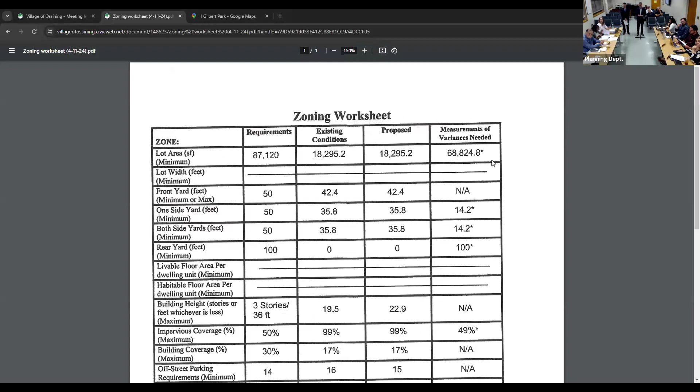Okay, I don't think that was a variance that was put as a requirement - I think that's just what's showing on the worksheet. Right, yeah, the requirements for impervious surface, parking spaces, which we brought into conformity so we don't need that one, and then the maximum size permitted for a freestanding sign.

Right, and I think with the parking spaces, the issue was some of the spaces along the right side of the property didn't have the proper length. Right, so he said they fixed it. Yeah, that's being corrected. Okay, so he said we could take that off, but he would make sure it's upgraded - the plans will have the dimensions for you.

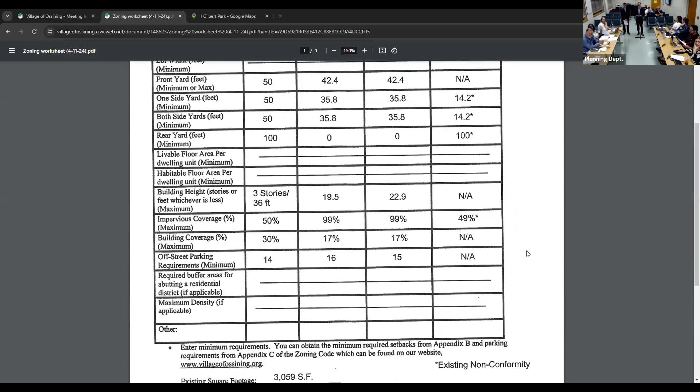And so just for the impervious coverage, the existing is 99%, the proposed is 99% - that's correct. So the question is, even though they're doing this new site plan approval, there really isn't much change in total coverage. So if that's the case, then I would think you wouldn't need a variance, right, either, because there's no change.

Okay, fine, we don't need that one. We can take that one off. Does the board agree with that, since there's no change to the coverage?

That's all striping that's being done on the site, correct? There's no new paving, okay. No paving, resurfacing. No resurfacing.

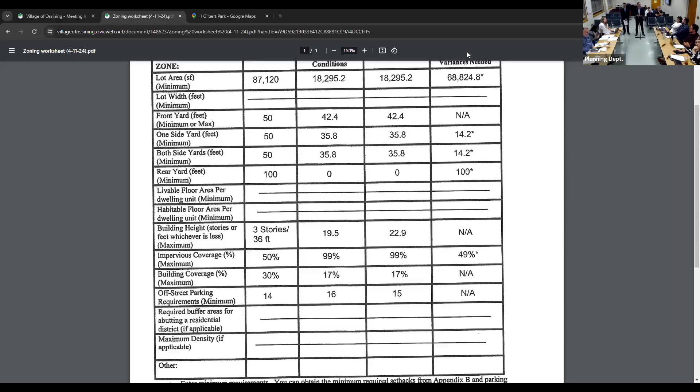So then it's just a sign? At this point it's just this new sign that's gonna need a variance, and I think it's the freestanding sign, correct, for the setback. The size - yeah, so 40, you're only allowed 40, we have 60.4. Correct.

So if the sign is the same size, we still need a variance? Well, he's saying the size of the sign you're replacing with is larger than what's permitted for a freestanding sign, correct? But it's the same permitted size as what's there. But it's a new case - you're replacing the casement and everything like that, so it's a new sign. It's physically a new sign - the old sign is coming down and a new sign is going up, but it's all new poles, same size.

I'll only say for the record, it's not gonna influence my decision on this step, but we just had the signage discussion that was several months long. I do have to say that if you're completely replacing something, you should be trying to get it closer to the code, because you have an opportunity to do it now.

But I'm gonna say we just talked about this with the gas station right down the street that had the same issue, the same size sign. So I can't imagine that we would ask this one, on the other end of the same street, to have a smaller sign. It looks like this is gonna be a Sunoco.

Do you know if the signage requirements are established by the Sunoco brand? I know for a fact that doesn't matter - they can do whatever they need to. Because I've seen two villages I've lived in where Sunoco specifically modified to meet the needs of the community, which didn't allow freestanding signs.

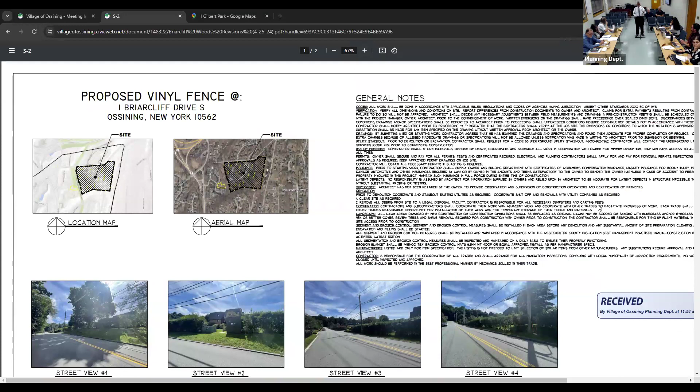We provided materials to show the board that one of the comments we received last time was the implication that having a 6-foot fence would set a precedent or really allow the same type of fences in the village. We just wanted to show that this kind of fencing is most common in the residential districts.

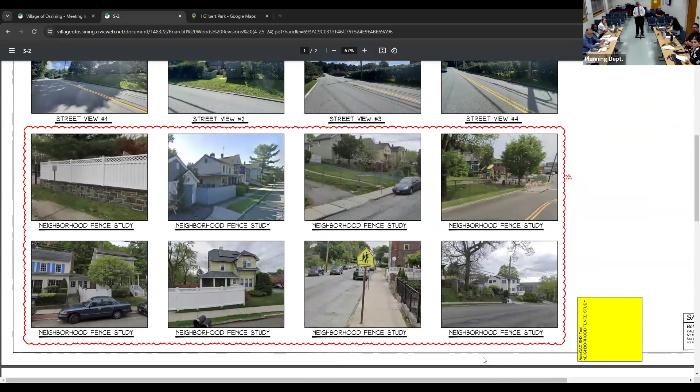However, having said that, we did listen to the board and to the chair, and we are proposing the fence to be a 4 feet high fence. So we reduced the height of the fence to 4 feet.

So that was one of the questions we had. Were you staying with the application being 6 feet, or are you saying your new application is for a 4-foot fence? Well, listen... Okay, that's a yes or no question.

I assume that's what we would have to do, right? Yes, I think that what we need, I guess it was not clear in what we were given, so I'm just asking for clarification. So are we still asking for a 6-foot fence, or are you asking for us to approve a 4-foot fence?

No, I think we'd be very satisfied with a 4-foot fence. Okay, that's what we need to know. So the fact that it's actually smaller, does that allow them to do this, so they have to move it?

So I spoke with Linda about this. Alright, sorry, I know we're all talking over each other. Can I get the name and residential address of both gentlemen since we're all talking? Sure, I'm the vice president of the board there, John Andoska is my last name, Andosca. Okay, need the address?

Sure. It's 3 Briarcliff Drive South. Thank you.

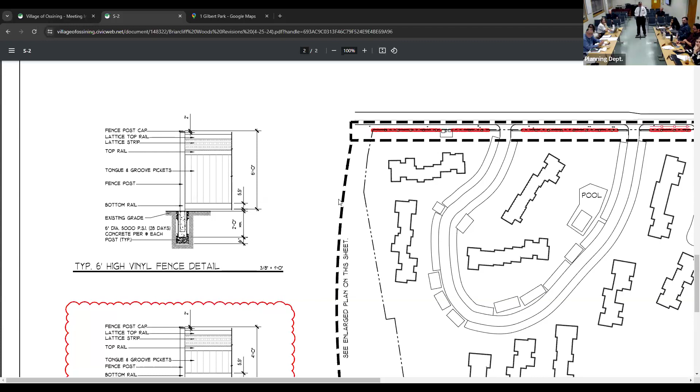I think the question was, if the application is changed to a 4-foot fence where it requires 3, as opposed to a 6-foot, is the board considered to continue forward with that, or do they have to renotice? I spoke with Linda about this today, and since the applicant's not proposing in excess of the 6 feet that was noticed, the board can proceed on the application for a 4-foot fence.

If the board feels that it has enough information to vote, it can move forward, otherwise it would be appropriate for the application to be resubmitted. Other than shrinking it by 2 feet shorter under this proposal, nothing else is materially changed.

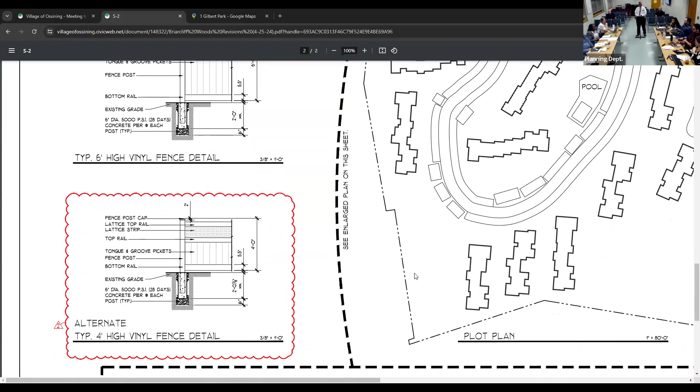No, so it's the same color, because again this said white vinyl and I was kind of confused. Are you changing the color? It's white vinyl. Same. So it is this, just a typo?

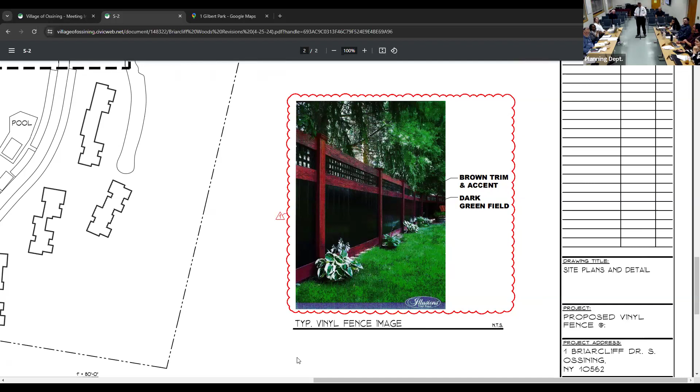Yes, okay, so what you're doing is the lower portion of the fence will be cut. And also, if you look at it, if it's cut down to a third, then you virtually have a 3-foot fence with about 8 inches of view above it, which is open. It'll be a 4-foot fence to the top, but the top portion is clearly see-through.

So it still remains true that you have a feasible alternative, which is to do what the other side of the street did, without having to come to the zoning board. Well, no, the other side has a 4-foot fence, that's why I'm going to bring this back, I guess.

But you can also see through their fence. So that's what they're doing, that's what they said - they lowered it down, so the part you can't see through is shorter, and the part you can see through remains open. And I'm speaking for them, but the proposal is to take away 2 feet of what you could not see through and open up the top part, which was the additional 2 feet, so that you could see up and down the road.

Which was some of the questions we had before, that there wasn't very much sight line, so they're opening up the sight, so it mimics what's across the street.

So we're talking about, we asked them for 1 foot on the height. Essentially, what they can do is make a solid 3-foot fence and not have to come in front of the zoning board at all. That's correct. But they're asking for the 4 feet.

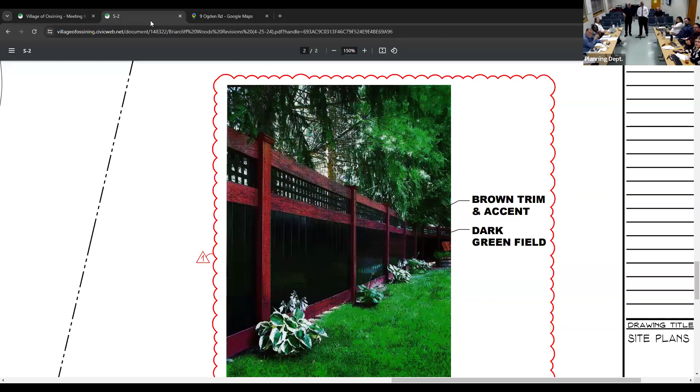I also - we have the fence, but if the concern is visibility, I mean you see that. That was your guys' safety concern that you wrote in your application, so I was addressing that. I just want to point out for the board, just because the nature of the application is important to your decision.

They're proposing a privacy fence, so across the street isn't necessarily analogous. I mean, yes, they have a slotted fence you can see through, but they achieve the privacy by the hedges, so that's the character of the neighborhood, much better. But again, Kyle, if you look at their submission, this kind of opaque fence is not inconsistent with the larger neighborhood.

So I'm one person, so let's not go into a hole where we just keep going back and forth based on nothing material changing, other than the board possibly recommending you go to 4 feet, if that's the determination. My vote's already locked because nothing else has changed, and I already made my decision after last time. We held it off for changes or new information, that was their right, my vote's done. I'm one person, so no one needs to convince me. I'll justify my reasoning during the 5 factors and we'll go from there.

But I think it's important, from the last meeting, and this is just my memory serving me halfway, that we did talk about them reducing it, and if they could bring it down to a reasonable number, to a 4-foot level, but technically what they did was give us a 3-foot fence with another foot of sight. So I think they're trying to compromise, to give us some wiggle room to talk about what we've been asking for, going through this process.

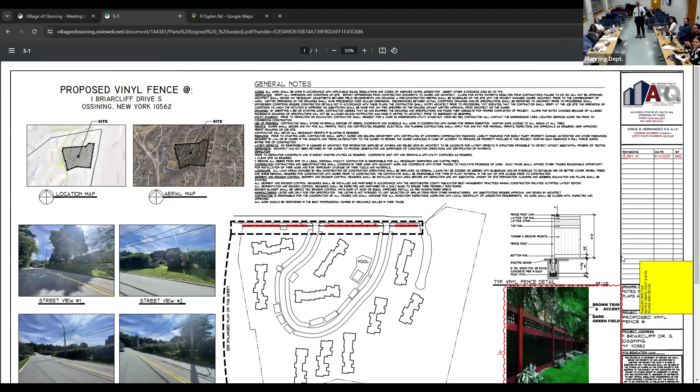You're taking the 6-foot sections you have now and modifying them, cutting down the bottom 6-foot fences. So are they gonna be that red color, Joe? They're not gonna be the color in the picture, they're gonna be white. No, they say in that color fence.

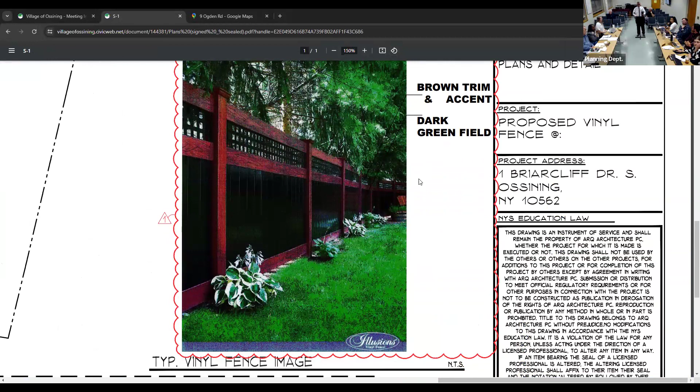The reason I was asking is because what it's gonna be reduced to. The planning board approved white vinyl and we got a different one? No, we haven't been with it. The planning board hasn't approved anything. No, but the proposal that was made was white vinyl, wasn't it? No, no, this one, they've always had that one. It says white vinyl, but they won't allow it.

My question is, because on that picture it shows that it has a burgundy rail on the bottom. Is that modifiable? Yeah, what they do is cut the green part and bring those rails up. I think they bury the posts a little bit more too. Just thinking about the sections, like when you usually cut vinyl fencing, you kind of...

No, because it goes into... you can, but it can be modified. This will be better anyway because headlights, when they hit this, will be deadened by the fence versus bouncing off a white fence. Better looking fence than a white fence. Yeah, it's the best fence they make.

I'm good to go. Me too. Same. So, may I have a motion to reopen the public hearing? So moved, Brian. Seconded by.

If there's no objection, the public hearing is now reopened. Is there anyone? No, I'm against this, man. Sorry, your full name and residence. If there's no one here to speak on this, either online or in person, may I have a motion to close the public hearing? Motion to close.

Seconded, Brian. Okay, may we go through all of the 5 factors? I'm just gonna repeat for purposes of the record, as the board knows, in determining whether to grant the application for the area variance, the board has to balance the benefit to the applicant with any detriment to the health, safety, and welfare of the community. In doing that, the board must consider the 5 factors. The first factor is whether an undesirable change will be produced in the character of the neighborhood, or a detriment to nearby properties will be created by the granting of the area variance.